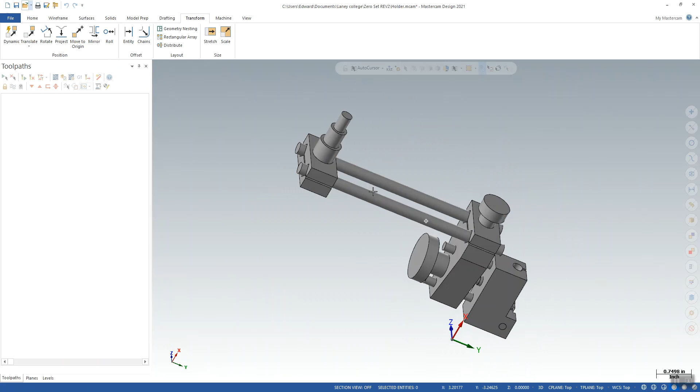So here is the assembly, and you can see there's 1, 2, 3 of these clamp parts. These 2 on the top that are highlighted in yellow are going to have a through hole in the center, for this to go through and for this knob to go through.

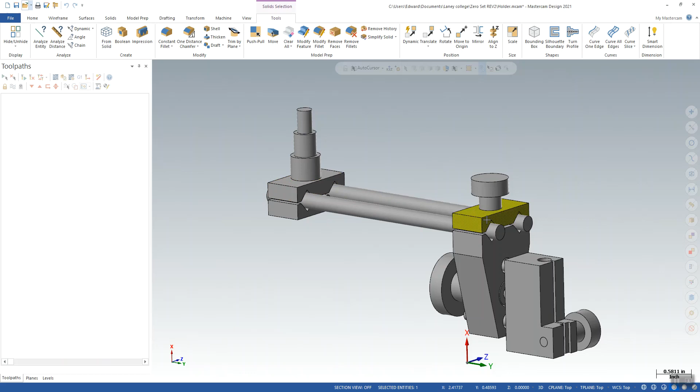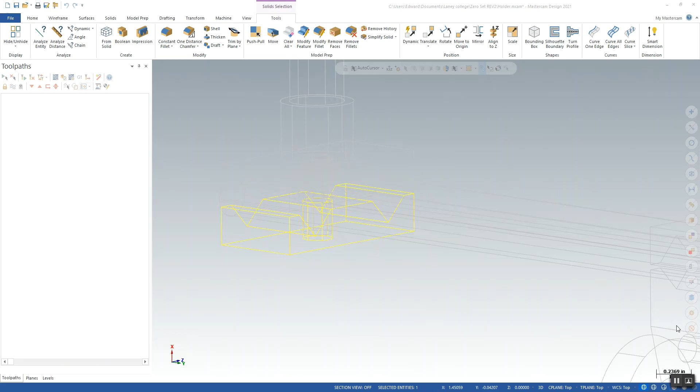This lower clamp part is going to have threads. This shaft here is going to have threads. You can see a little wireframe view. Not so good, anyways. Sorry, a little issue there with the control panel.

So anyways, this lower one has a tapped hole, and these 2 up here have clearance holes. Alright, so if we open the part

that I send to you, the clamp, you're going to get this little pop-up. It says tapped or default, so it doesn't really matter. You can just click default.

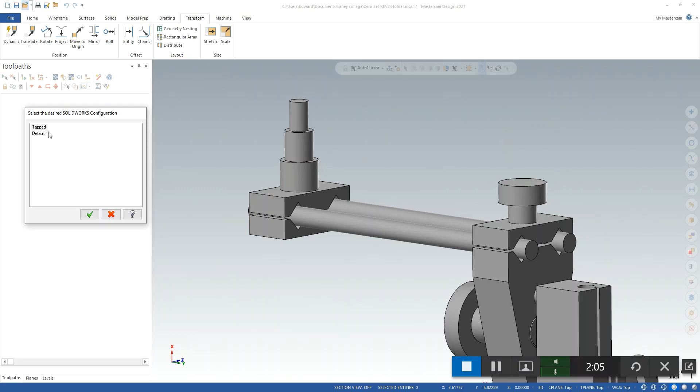So in comes the model. And like I said, we're going to make 3 of these, and we're going to actually make them at the same time out of 1 piece of stock. So the first thing we're going to want to do is copy this part over 2 times so we get the 3 models in the configuration that we want them.

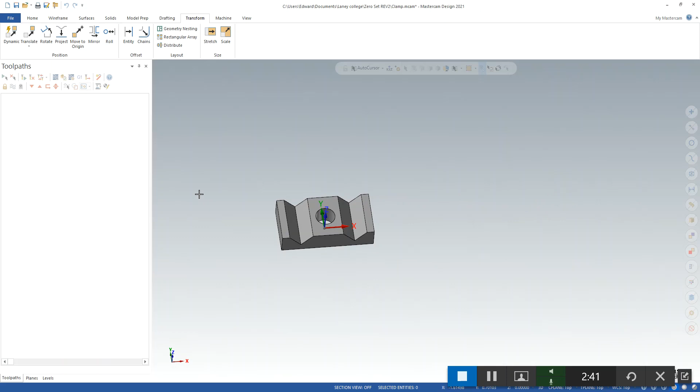So go and click on that, transform, translate. I want to move, and the distance. Alright, so how far do I want to move it?

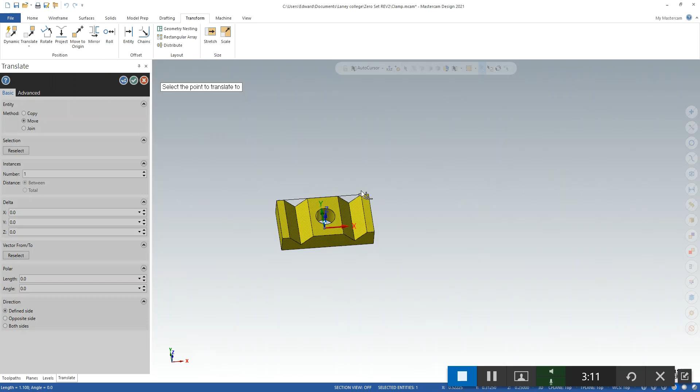Well, I can start by doing this from-to, and I can start from this corner to that corner. Let me zoom in, right there. Oh, I'm sorry, copy, not move. Alright, and then I need a little gap in there

for my end mill. I'm planning to use a 1/4 inch end mill because it's a pretty small part, to do the profile around the part. So I'm going to want to increase that distance by 1/4 inch plus a little extra, so I will go plus 0.3,

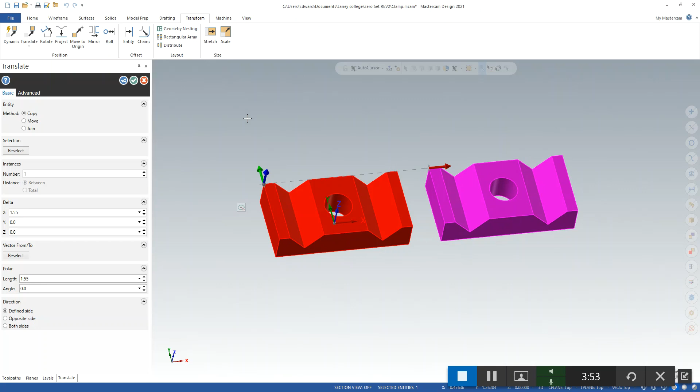and then I want 1 more copy. So right here in the number of instances, I'm going to increase that by 1, so it's 2 instances copied, just like that. Green check. Right click, clear colors. Now I have my 3 parts.

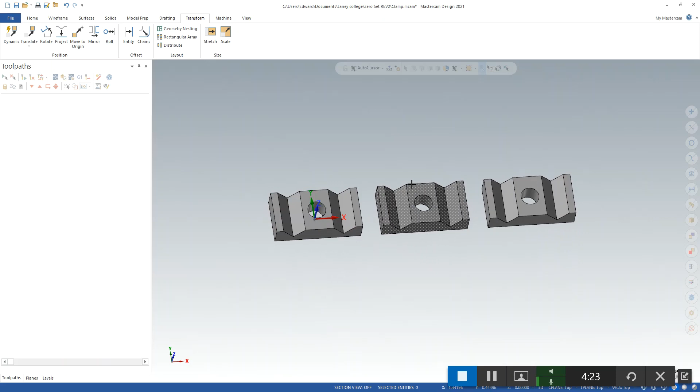Now you might think, alright, this hole, they all just look like through holes, and they are, but it doesn't really matter. All the hole really does is give us our location, so depending on what we do with it is how the hole will turn out when we machine it.

Okay, the next thing I'm going to do is I'll bring in the machine. I use mill 3-axis VMC. You can use default, doesn't matter.

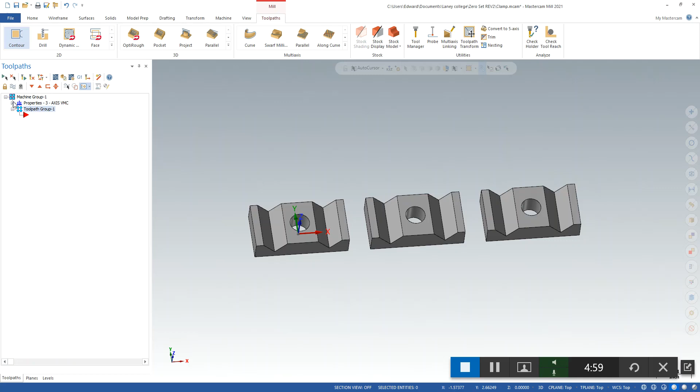And I'm going to go to the stock setup, click on all solids. That's going to give me the overall. So if I was to click the green check, you see it puts the stock around all solids.

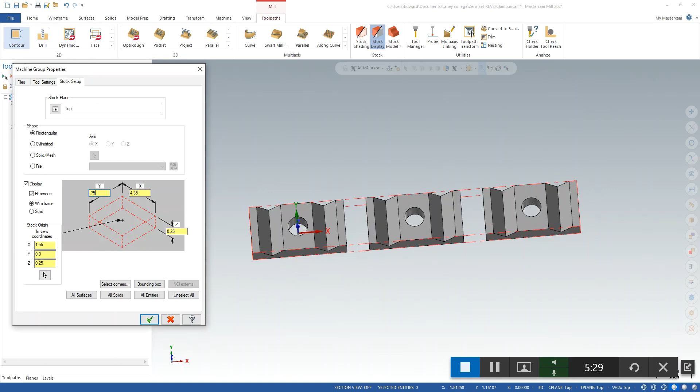Our stock's going to be a little bit bigger than that though. It's going to be 3/4, and we'll cut it 4.5 inches long, and it's going to be 3/8 thick. Okay.

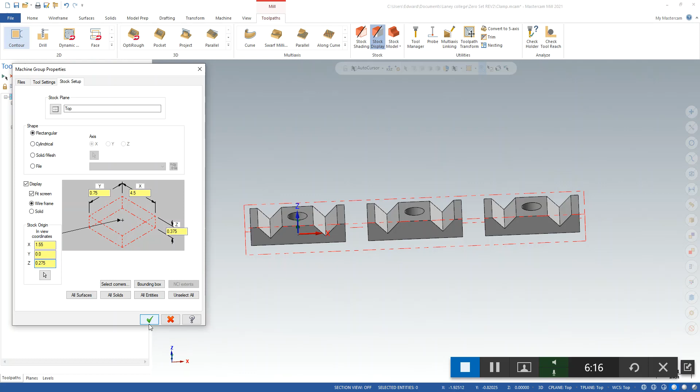We can move it up in Z a little bit. Okay, there we go. So I made that change to 0.275. That gives us a little material on the top to face off.

Alright, so the next thing I'm going to do is I'll bring in my plane, my coordinate system. I'm going to go here to the plus. I'm going to do a from solid face. Right there, that's the orientation I want.

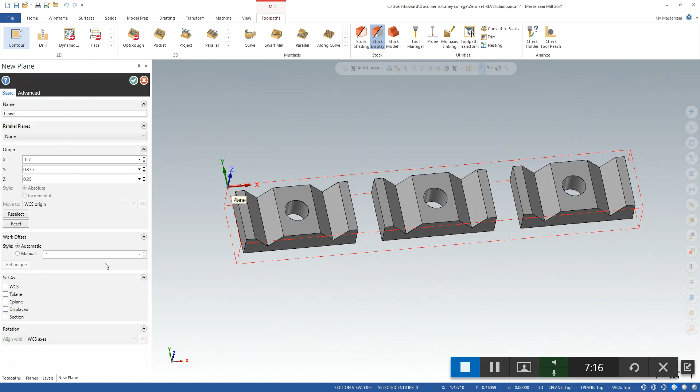I'm going to click reselect. I'm going to snap it to this corner right here. And then I'm going to move it minus 0.075 in X and plus 0.0625 in Y. That should get me on the corner.

And then Z is at the top, top of the part, not top of the stock, just like we set up before. Check. And then highlight that, hit the equal sign to make it my current plane.

Okay, and last thing I'll do before I start throwing toolpaths at it is I'm going to go into tool settings and assign tool numbers sequentially.

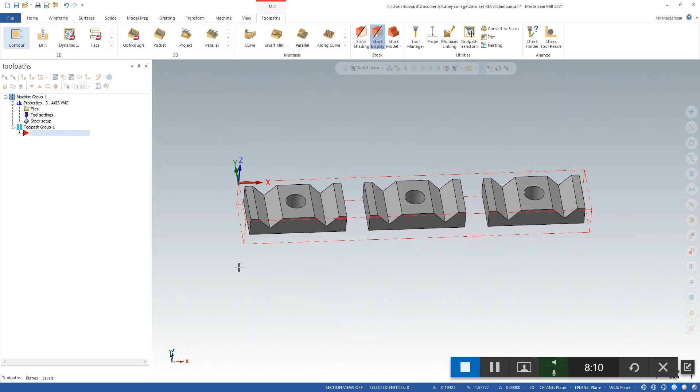Alright, so our first toolpath is going to be facing, so we'll face the top. So face. And if I come over here to wireframe, it'll tell me just to select OK to use the defined stock, so I don't really need to choose any geometry, I can just use the defined stock. Green check. For my tool, I'm going to use a 3/4 flat end mill.

Okay, speed and feed info right here. So I'm going to go with 750 surface speed, 0.0025 chip load. Plunge rate, I can bump that up. I'll just go to 20, a nice even number.

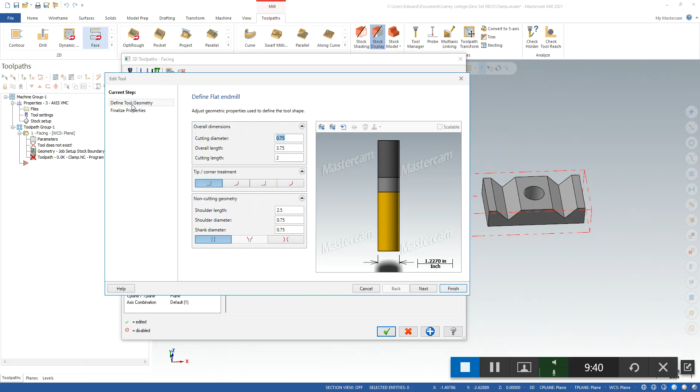So you might not get those if you use a 3/4. Let me do this, right click edit tool. I'm using a 3 flute here on the Finalize Properties. The standard one you might have is a 4 flute, so you'll want to change that to 3 flute. If you change that to 3 flute, then come back in and put in the numbers for surface speed and chip load, then you should get the same speed and feed numbers as me.

Okay, and then rapid retract. Alright, for cut parameters, I'm going to change the style to 1 pass because the diameter of the end mill is greater than or equal to the width of the stock, so I don't need to go zigzag or anything like that. And then here are the overlaps. So yours may look different. If they do, you want to change it to match mine.

Have all this stuff kind of set in my defaults, which we'll show you how to do later. Alright, depth cuts I don't need. Linking parameters: retract, feed plane, top of stock, and my depth is 0. Coolant, make sure coolant is on. Green check.

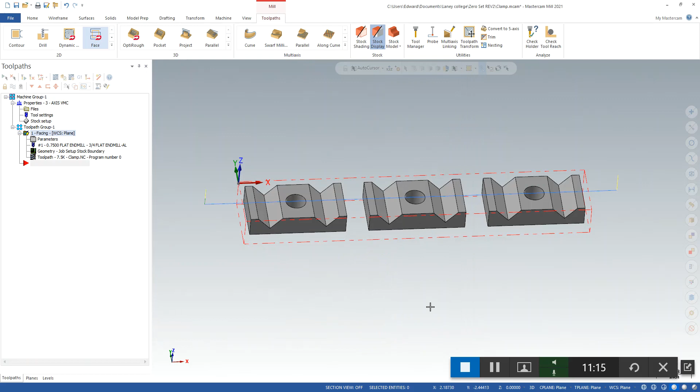There's my facing pass. Alright, now that we got it faced, we can go ahead and attack these holes. So we have 2 holes which will be clearance holes for a 1/4-20 thread, and then the third one will actually be tapped 1/4-20.

So first thing I'll do is spot the holes. So drill. I'm going to select the first 2 holes. The spot's going to go a little bit deeper on those to give us our chamfer after the hole's drilled. So over here is the spot drills. I have 2 set up, one for aluminum, one for steel. So just grab your spot drill, 2500 RPM, 10 inches a minute.

Drill, and I want to go for my depth. It's going to be about a 260 thousandths diameter hole, and I want about a 10 thousandths chamfer. So that gives me a diameter of about 280 thousandths. So with a 90-degree chamfer, my depth would be half of the 280, which would be minus 140.

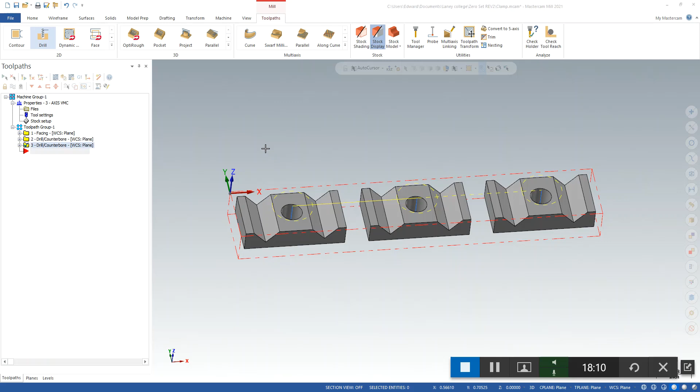Next, I'm going to drill this hole for the 1/4-20 thread. So consulting my drill chart tells me that a number 7 drill is the right size for a 1/4-20 cut tap. So that's going to be a number 7 drill, 0.201.

Okay, and let's do kind of a crazy speed and feed. Usually I go around 100 surface speed and about 5 thousandths for that drill. So I'm just going to do a straight drill, don't need to peck or anything, it's not going very deep.

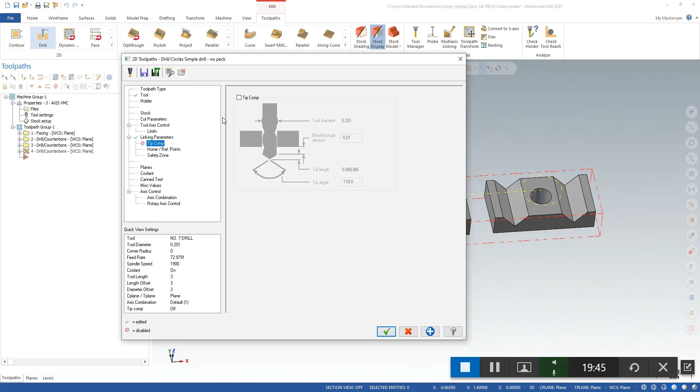Alright, let's see, so for my linking parameters, my depth, I'm just going to say minus 0.375. And I'll add tip comp for this one. Okay, coolant is on. Green check. Highlight those, hide those tool paths.

And then drill, and I'm going to click on this one here, copy previous point. So I'm going to do that same hole, I'm just going to run the tap through there now. So green check. And for my tool, I'm going to go select that 1/4-20 tap. Filter - I'm going to be careful here because of left and right hand taps. So right hand tap, 1/4-20 right there. Green check.

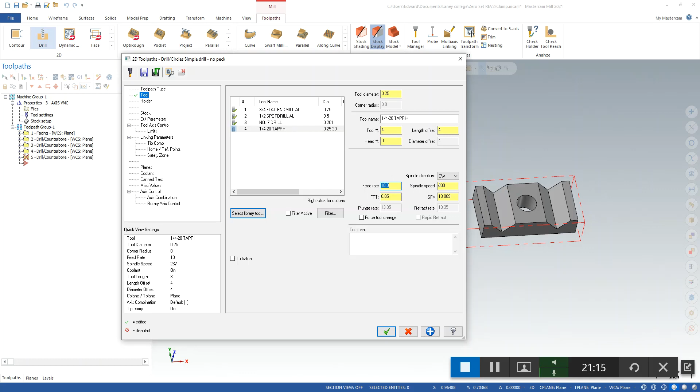Speeds and feeds are kind of weird. I like to go 10 inches a minute. And it also helps you double check that your speeds and feeds are right: if you multiply the feed rate times the number of threads per inch, 20 - 10 times 20 is 200 - and that is your spindle speed. Okay, so for our cut parameters, go to tap, linking, go minus 0.4.

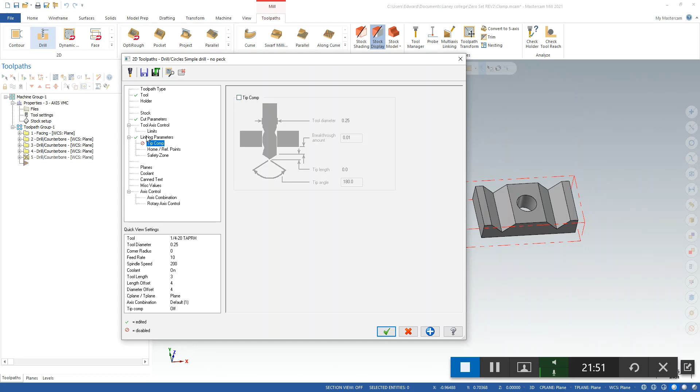Taps I usually like to retract a little bit higher, so 0.25. And no tip comp on a tap, so turn that off when it's on.

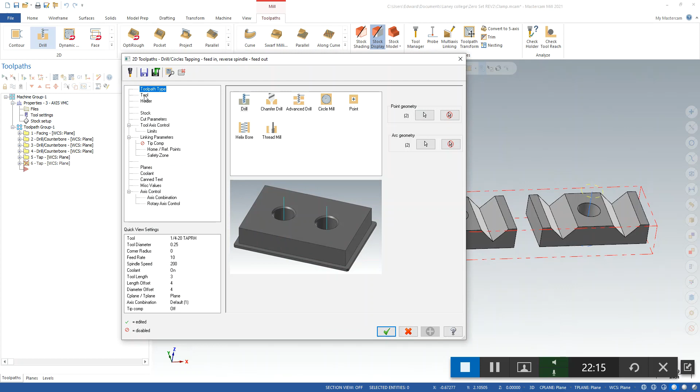Okay, then I can go ahead and drill these other two holes for the clearance hole. So drill again. One, two. Recheck for the tool.

260 is not a real drill size, so we can go ahead and use a letter G, which is a 261. Again, it's just clearance for a 250 thousandths, 1/4 inch screw, basically.

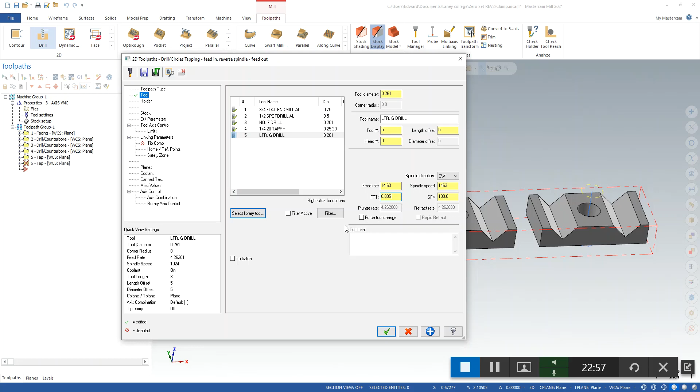So letter G works. Go ahead, 100 surface speed, 5 thousandths chip load. Cut parameters is going to be drill, linking minus 0.375, and tip comp. And coolant is on. Oh yeah, I gotta fix that.

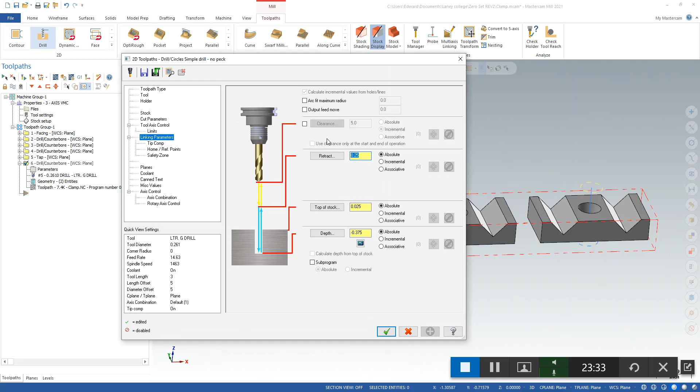So I'll go back into the retract. Doesn't need to retract that high with the drill, so I'll change that back to 0.1. Check and regenerate. Better.

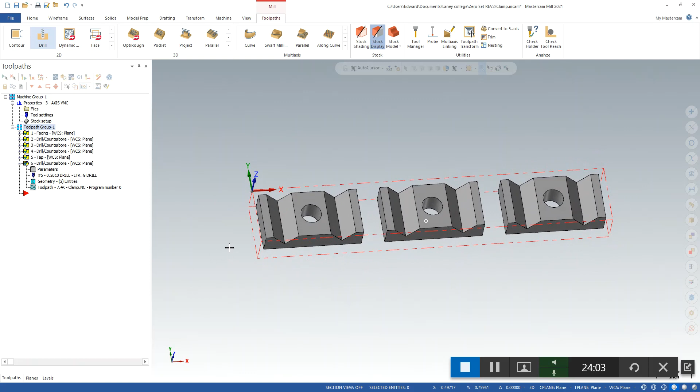So now we got the holes done. We have left to do are the grooves and the profiles. So first thing I'm going to do is go around the profiles, so that's going to be a contour toolpath. Alright, and I'm going to use my solid selection tools here.

So again, edges, like a single edge you can link. A loop is like a full chain in wireframe. Partial loop is like a partial chain in a wireframe. So I want a full loop, and I'm going to select.

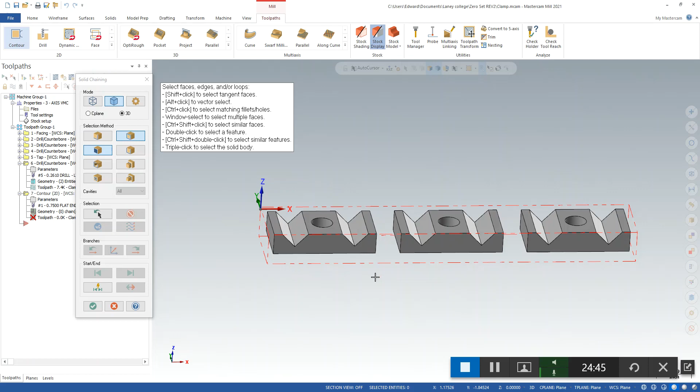Obviously, I can't select anything up here on the top because it won't give me the path to go all the way around the part, so I'm going to have to use this bottom geometry here.

So there, when I hover my mouse over the edge, it shows me that dashed rectangle that aligns with the path that I want, just like that. Okay, so I'm going to go ahead and do that for the other two parts as well. Click that, and click that. Okay, so green check.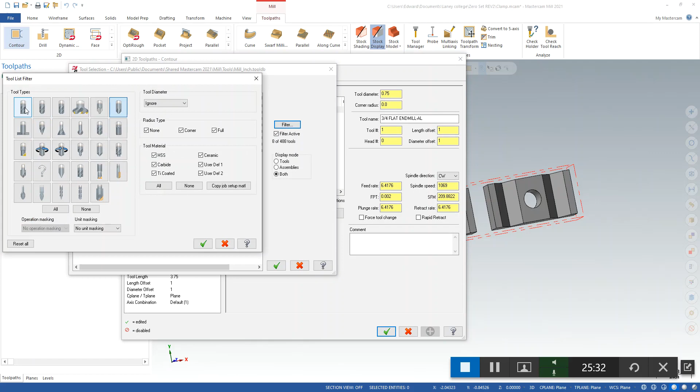For my tool, as I said, it's going to be a 1/4 inch end mill. So filter to end mills, 1/4 inch flat end mill, green check. Again, you can see the dash AL - those are the ones I specifically set up with speeds and feeds, so you can go ahead and copy those.

Okay, for my cut parameters, it's going to be wear compensation, 2D contour. I'm going to go ahead and add this external corner break radius, that way I don't get the sharp corners on the part. So I'm going to put 20 thousandths for an external corner break radius.

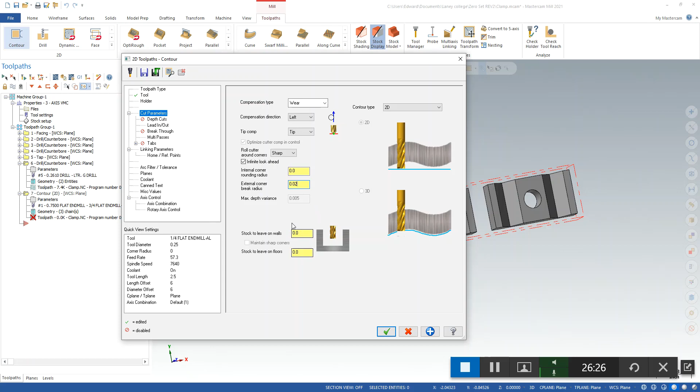Okay, I don't want to leave anything on the walls or the floors. Okay, my lead in, lead out information - again, this is my sort of default stuff, so you can copy that. And then I usually don't do the midpoint.

So if you do the enter/exit at midpoint, then it's going to start in the middle of the part here, and you're going to get a little divot in the side of your part. So if you uncheck that, it's going to start at the corner.

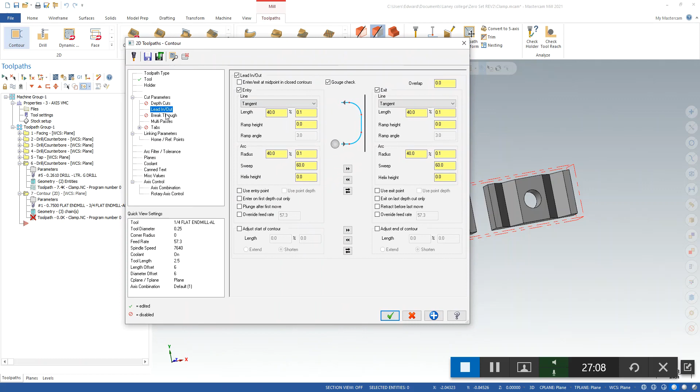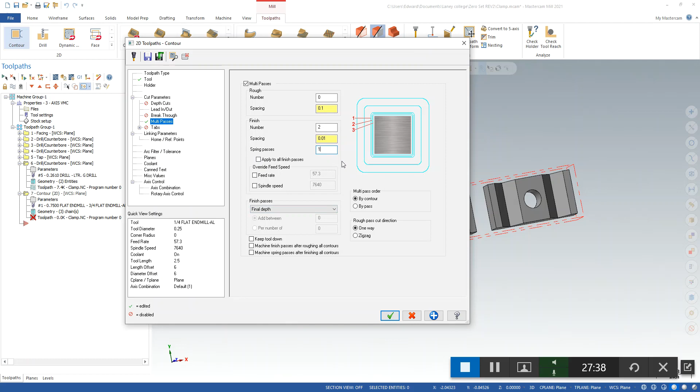Alright, multi-passes. So I'm going to go 2 at 10 thousandths. That's basically going to give me one rough pass and a finish pass at 10 thousandths. And I usually always like to do one spring pass - that's just my default, but for this it may not be necessary, but we'll leave it in there anyways.

Alright, so now for the depth, we're holding this in Mighty Vise jaws. The stock is 375, the part is 1/4 inch thick, so that gives us 125 thousandths. We need 100 thousandths for the Mighty Vise to hold on to, and so that leaves us about 25 thousandths. We need a little bit to face off the top, probably about 10 thousandths, so that leaves us about 15 thousandths.

So what we'll do is we'll just go to about -260. Now you notice that it came in at -250 because the geometry that we selected was the bottom of the part, so it's going to automatically put in that depth of the geometry that we selected. Alright, so 260 deep, coolant on, green check.

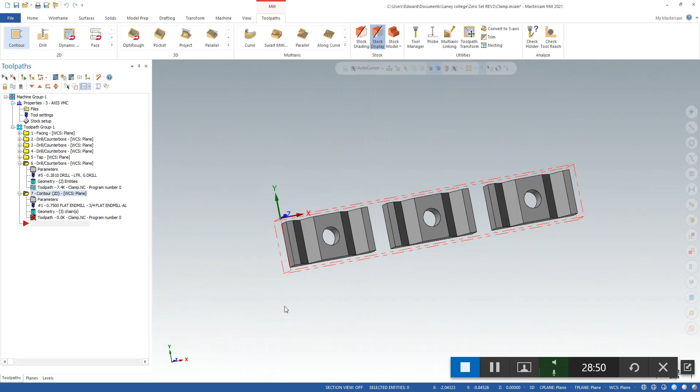So if we want, let's do a quick little verify, kind of see where we're at so far. Alright, looking good so far.

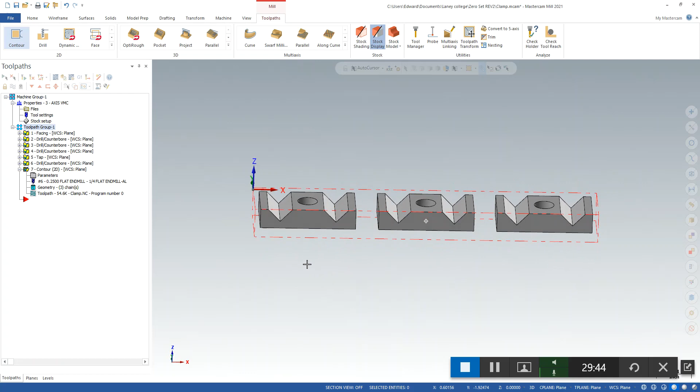So we just got to do, we got some chamfering. So first thing we'll do is these big grooves here. We're going to use a chamfer mill to do that. Those are at 90 degrees.

So that's going to be a contour toolpath, and this time I want to use single edges for my selection. And I'm going to go ahead and select the bottom edge there.

You can notice I went back and forth - that'll allow the tool to make a more efficient path.

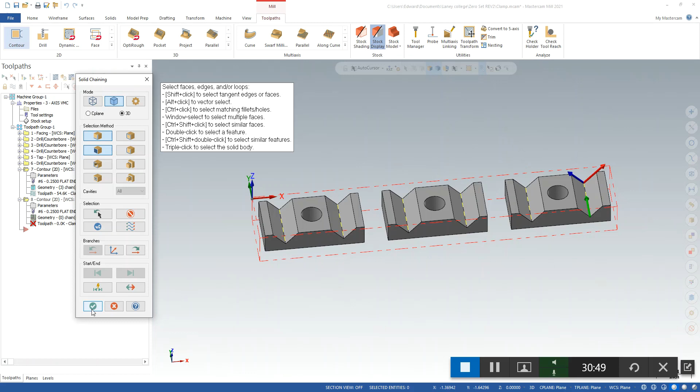So for this tool, it's going to be a 1/2 inch 90-degree chamfer mill. Chamfer mills are over here, top right corner. Double click on that, and 1/2 inch 90 chamfer mill. I guess I don't have one set up for steel or for aluminum, so I'll just use the steel one and modify it.

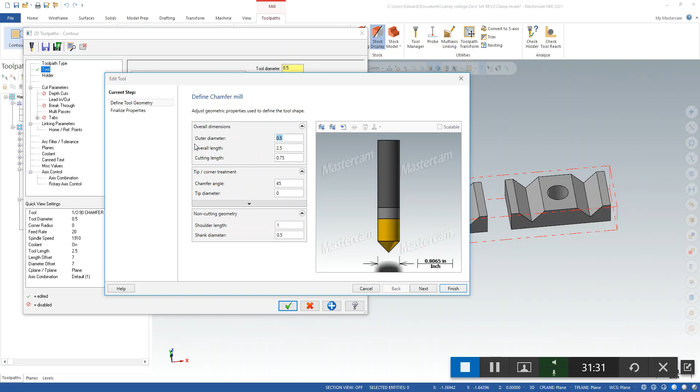So if I do a right click, edit tool, change that.

Alright, so I'm going to change it to 500 surface speed, .0025 chip load, and 40 on the plunge, rapid retract. Kind of slowing it down a little bit on the feed rate because it's going to take a pretty good cut there.

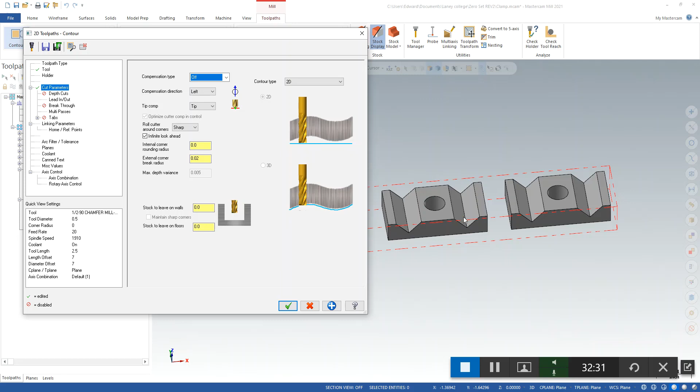In that groove, so for cut parameters, for compensation type, I'm going to actually turn the compensation off, right? Because I want the center of the tool to follow that geometry that I selected. The center of the tool is going to go right down that edge that we chose. Alright, and then I'm not going to do a lead in or lead out.

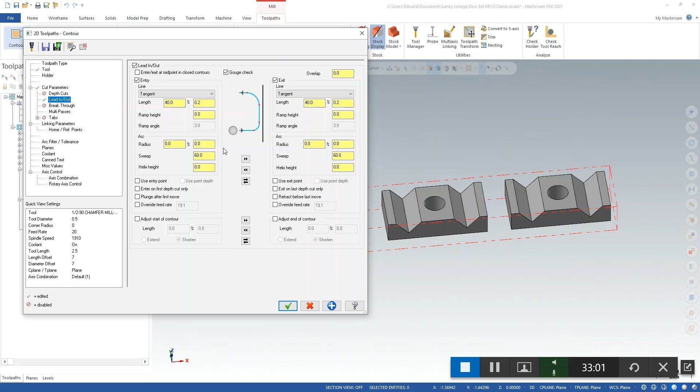Actually, I will, but I'm going to take away the radius. I just want a straight line in, straight line out. Since I'm not doing wear compensation, I don't really need a lead in, an arc in. Alright, and then multi-passes, I don't need that.

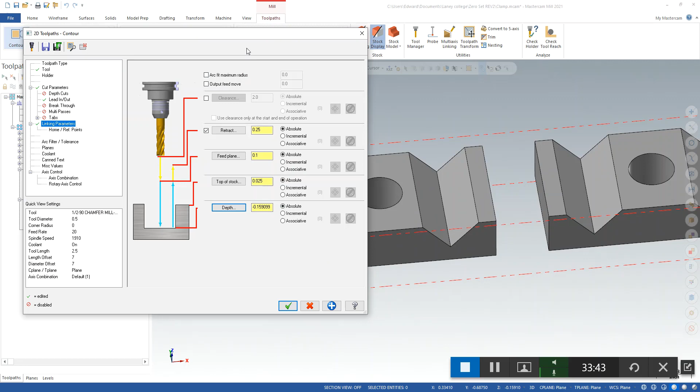Let's see, linking parameters. So if I click on this depth here, I can select wherever I want the depth. So it should have already come in because that's the geometry that I chose. Again, it's a nice thing about using solid geometry instead of 2D wireframe.

Alright, coolant on, check. Alright, so there's that.

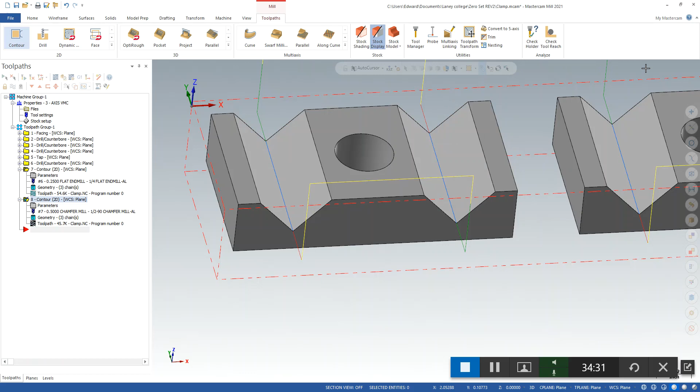Now, the thing with sending the half-inch chamfer mill through there, it's fine, but it does kick up a burr on that edge or on the side here when it comes out. So over here, you know, certain sides, this is going to be a pretty good sized burr.

So what I'm going to do is I'm going to take the end mill and just run it around one more time to clean that up. That way we don't have to do it by hand.

So if I click on toolpath number 7, highlight that one, make sure no other toolpaths have a green check mark. Then I'm going to hold the right mouse button down and drag it down here, release the button, and select copy after. So that brings my flat end mill contour.

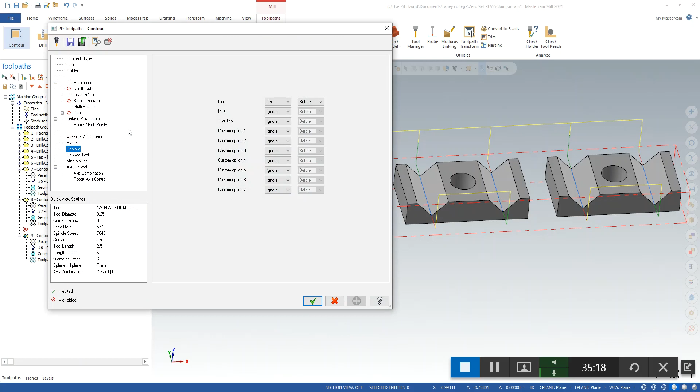Basically I just copied that down, and I'm going to go into the parameters and I'm just going to take out those multi-passes because I don't need the multi-pass. I just want it to go around one time just to clean up the burrs. So green check and then regenerate.

And then the last thing is I'm going to send a deburring chamfer mill, a smaller one, just around the top rectangle, just to get all these little edges here and here and here. So all those little edges around the outside, that'll be sharp. So that's going to be like our deburring.

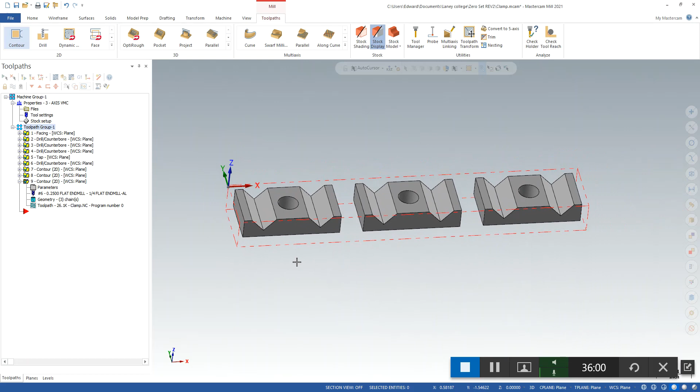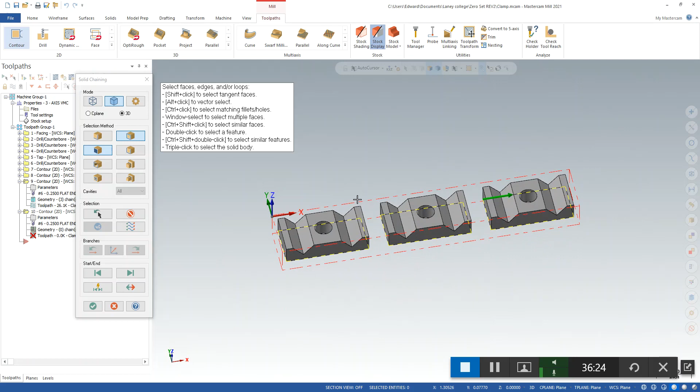Okay, so again, contour, and I'm going to select loop. And again, I'm going to check, just like before, these 3 rectangles. Okay, so it gives me the path around the outside that's going to get all those outside edges for me.

For my tool, this time I'm going to select a 1/4 inch chamfer mill. So there's my speeds and feeds for the 1/4 inch chamfer mill.

And then this time for the cut parameters, my compensation is going to be computer, and my contour type is going to be 2D chamfer. So this is going to allow me to specify the chamfer parameters. So I want a 10 thousandths chamfer.

The bottom offset, as you can see there, bottom offset creates the chamfer to move over to the side to hang off, so it'll cut because the chamfers don't cut on the bottom. So my bottom offset is going to be 0.05.

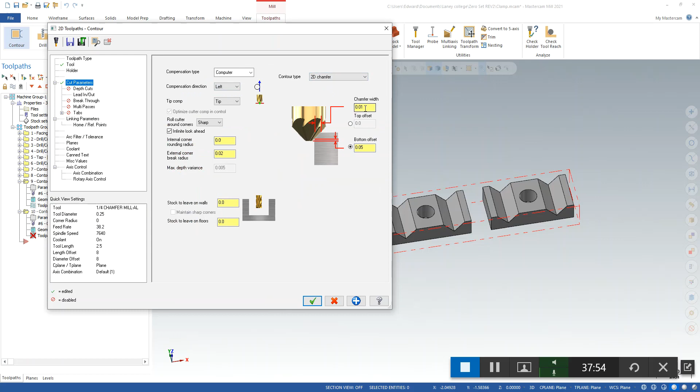My lead in, lead out, it's going to be like normal. And then for linking parameters, when you use this 2D chamfer routine, you're telling it how big of a chamfer you want. So for your depth needs to be the top, or wherever there's going to be the sharp corner, right? That's what you want. So for us, that's actually the top.

That's 0, Z0. Now it says minus 0.25 here in the depth because we chose the geometry at the bottom of the part. But we had to do that because that's what gave us the path that we wanted. So I'm going to change this to 0.

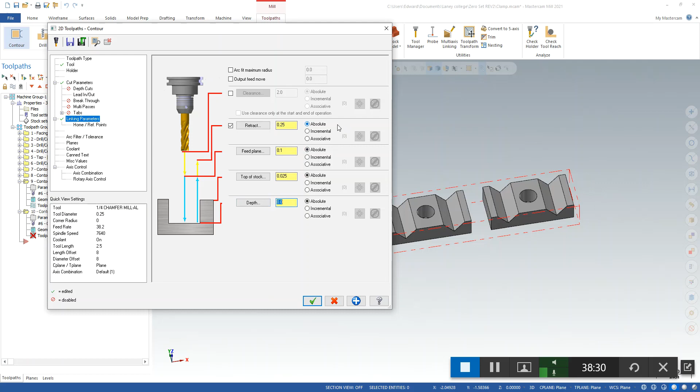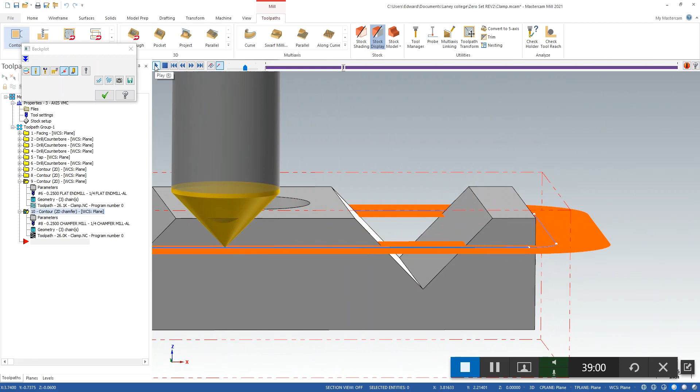Alright, coolant's on, green check. Okay, so you can see that. If I do a back plot on that tool path, you see the chamfer mill going around, taking a little shot. Okay.

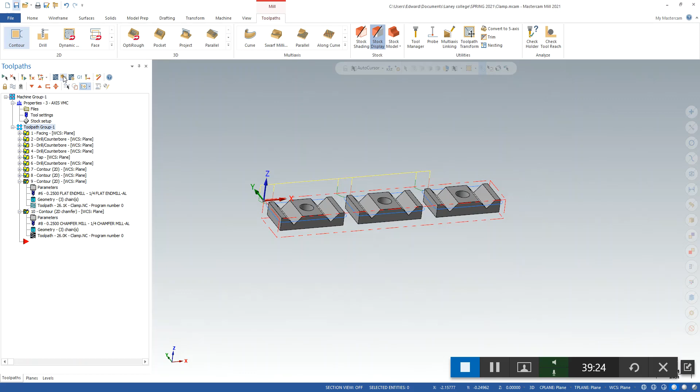So let's see. Let's go ahead and save it at this point. And then I'll highlight all the toolpaths and I'll do a verify. Alright, looks good.

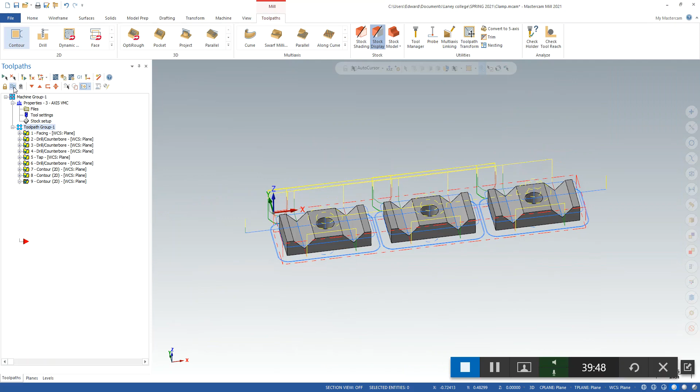And that completes OP1.